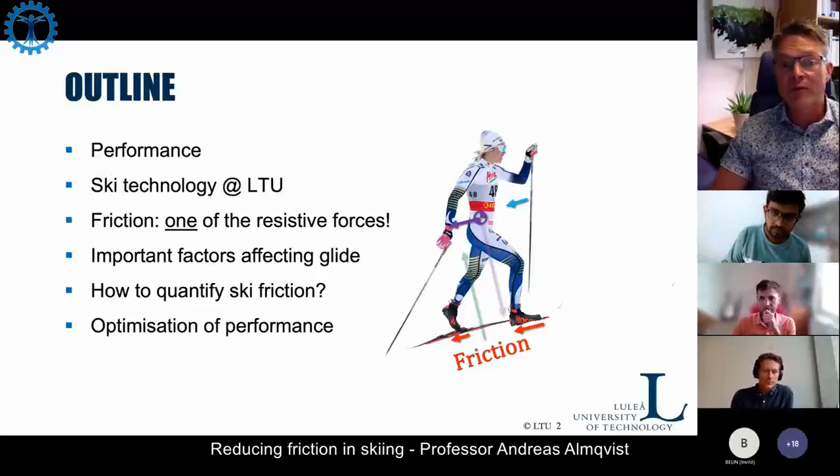And in the end, I hope to deliver what we aim at, namely to optimize the performance for an individual athlete.

So if you look at this performance loop, you realize that it is about how the athlete's physiology and biomechanics and the sport-specific technique and technology together contribute and collaborate in producing propulsive forces and in causing resistive forces.

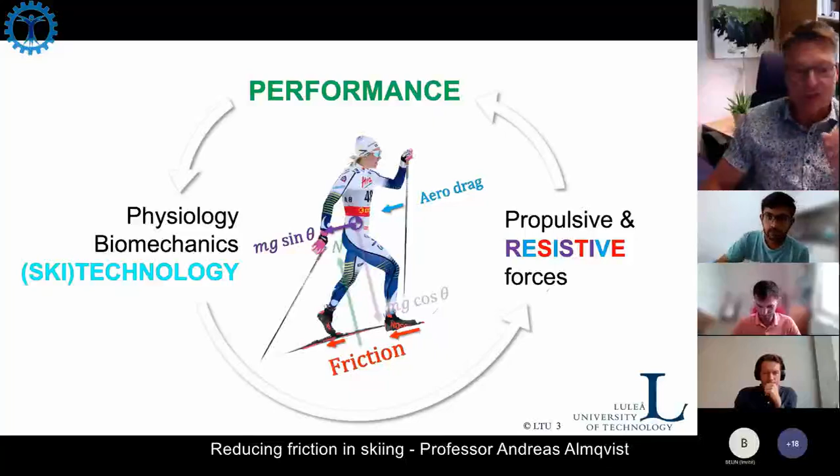Resistive forces are what we have been focusing on here in Luleå. The ski tech team here works together with the Swedish Olympic Committee and the national teams in both cross-country skiing and biathlon.

What we are trying to do is carry out real scientific studies on how to select ski type, ski base grind, waxing and metal embossment drilling to optimize glide performance for different conditions. We work currently in 3 parallel but highly interconnected tracks.

We look at both the interaction between the skier's biomechanics and the material. Then we have a virtual ski laboratory where we build models based on what we have from machinery tribology and continuum mechanics in general. And then we build and develop tribometers and test methodology to actually quantify friction in skiing.

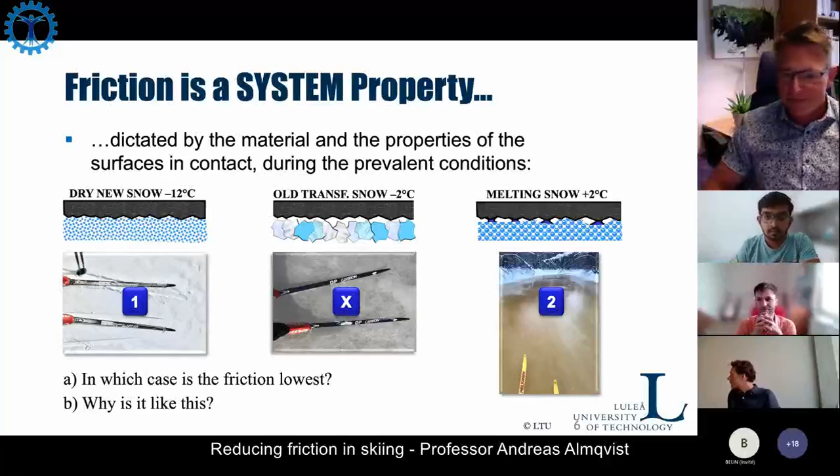What we are trying to do is, of course, answer why this is the case. And to do that, we need to consider a number of different factors.

For example, the load - the skier's body weight under gravity and on the track in all directions - will affect the frictional behavior. The geometry of the ski and of the track itself. And then on the micro scale, the surface topography and the snow - what does the snow surface look like at a certain condition? Also the hardness of the ski base and the hardness of the snow.

Here I've listed an acronym for the base material in skis: ultra high molecular weight polyethylene. That can be doped with different other constituents to enhance the gliding properties and also the wear properties of the material.

Wetting - we know that hydrophobicity is a player in skiing. So both the wetting and the surface tension matter.

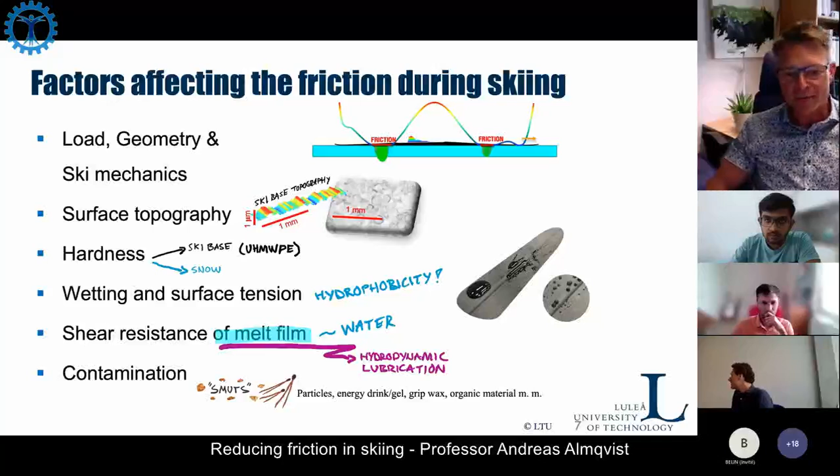So, maybe there are other factors too, but these are the main players. Once we know them, we also need to quantify and analyze the effect of them. For load, for example, we can do plantar pressure measurements.

We put an insole in the skier's boot, and we can measure the plantar pressure distribution, so we know how their position affects the equivalent loading position on the ski.

We can also measure the pole force with specially equipped skiing poles. By this we can tell quite a lot about the propulsive forces during skiing for an athlete performing various techniques.

For the geometry, we can use ski camber analysis devices and machines. One example is a giant profilometer stylus that measures the height of the ski when it's subjected to a certain load. We can complement that with numerical methods to tell more.

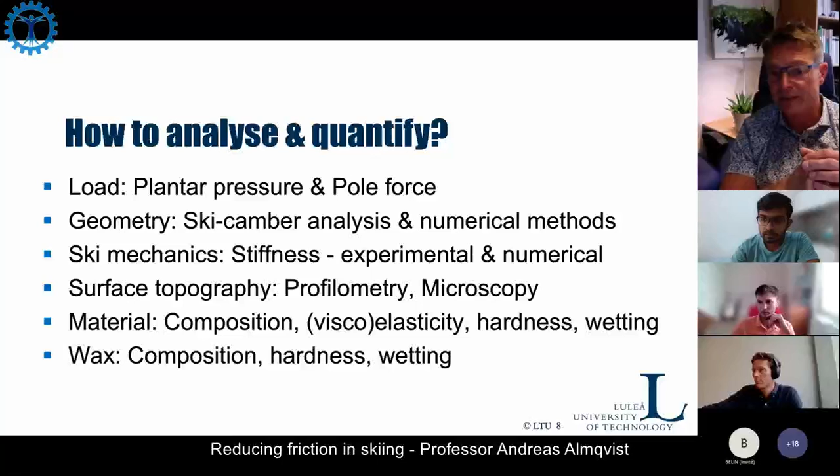Now, skiing. Friction in skiing means that we are viewing a multi-scale and multi-physics problem, like most of the tribological systems that we have. They are mostly of this type, but the difference is we have different physics perhaps on different scales in different applications.

What we see here is a ski camber profile, the profile of a ski loaded in a ski camber analysis machine. To see the height variation, I need to amplify it 100 times here. We see the plantar pressure distribution of the skier and the equivalent loading position that is actually causing this camber profile, and that causes the glide zones to appear exactly where they are. It's in those glide zones that the friction develops.

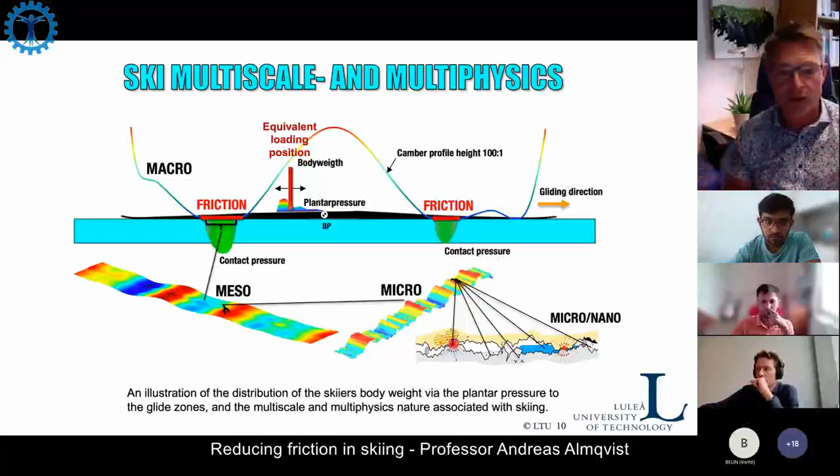But then there's the multi-scale aspect, and we will see what happens on the different scales. If we look at the glide zones with higher and higher magnification, we will see different things, and all of this contributes to friction in different ways. We will go into that in more detail here.

In the next slide, we can see schematically how the load from the plantar pressure on the skis actually causes load between the ski and the snow track. If we exaggerate the ski cambers, we can see that the profiles of the left and right ski will be different. This is a dynamic problem also. Think of when you are gliding, there's always something that makes you not stand exactly with the same weight on each boot. So either the track or you can cause this.

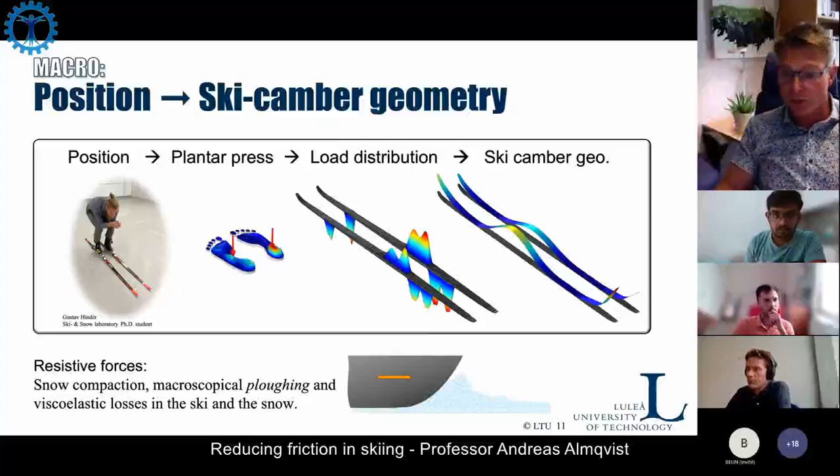The resistive forces that result in friction are mainly due to snow compaction. If we glide like skating, we are constantly paving our way on the track. The track is prepared, but we are still doing a lot of snow compaction with the ski. We will have some macroscopic plowing of the snow, perhaps if it's too grainy or if it's fresh falling snow. We will have viscoelastic losses both in the ski and in the snow itself. So there are quite a lot of things happening here on the macro scale.

That was for the ski part. If we look more into this, we have the ski camber geometry. What is actually affecting this? If we view the glide zones as two bearings from a tribological perspective, we realize that these angles might be very important. First, the leading edge angles, and then perhaps the trailing edge angles, and if there are internal pockets and so on. Also ski stiffness and damping, how the ski is built.

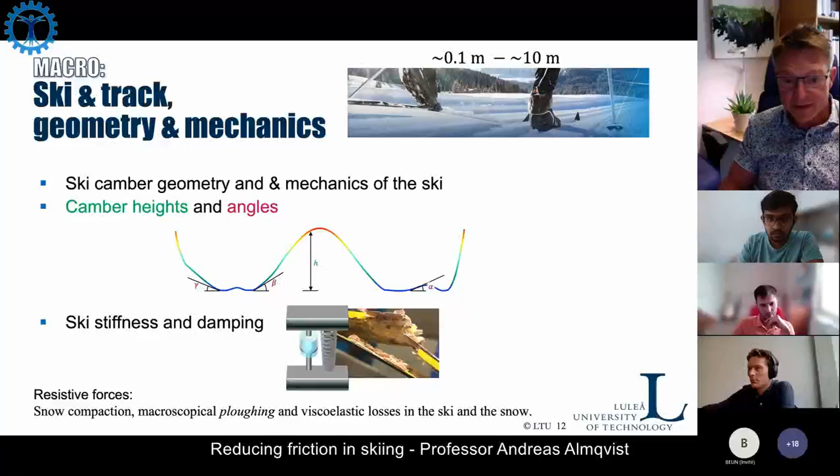Here we can see a broken ski, and we can see some of its interior. It has this honeycomb structure, a composite with a honeycomb structure, and this particular ski also has wood beams, or whatever you call them when they are that thin. There are many different materials inside the ski, and that causes it to behave in a certain way mechanically. So again, we will have these losses as I listed.

This ski camber we can measure, appreciate, and estimate in different ways. The traditional way is to place it in this machine, a ski selector, the brand, and then apply the load at a certain position with this type of shoe, or whatever you can call this piece of load transferring interface to the ski.

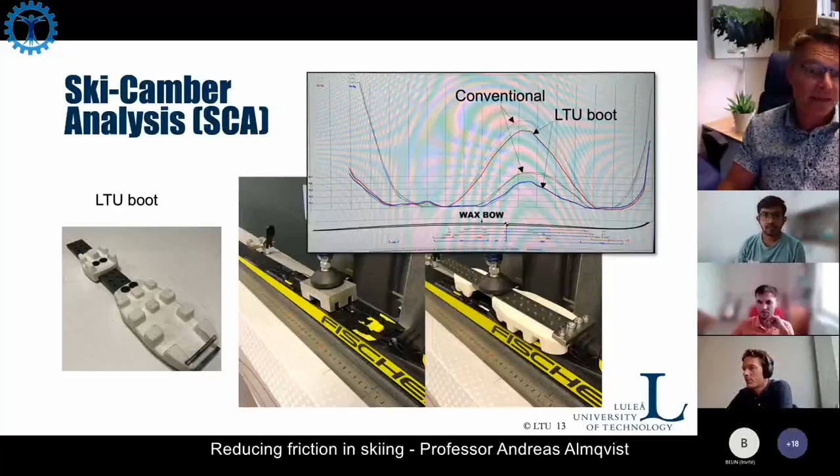But what we quickly did here in Luleå is develop a measurement boot, because we understood quite quickly that this one will not distribute the load the same way as the ski boot does. That can be clearly seen if we compare a conventional ski camber measurement with the LTU boot measurements—they are rather different. Here is some illustration of how the load affects the ski: here it can only affect that area, but here it will affect a much larger area that will cause the ski to collapse in a different way.

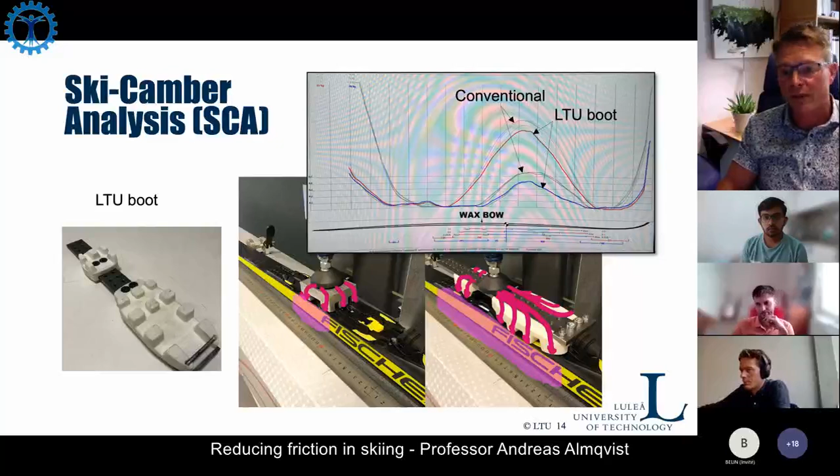If we complement now this, now we come to the dear child of mine. So how to complement these measurements with some computational tribology. So we use our boundary element code and include not only the load balance but also

the moment balance of the ski. And we actually use an ANN which we train on the ski so that it can give us very quickly the ski camber for almost any load and position very accurately. So we can really run quasi-stationary gliding in our tool here, in our numerical tool.

Well, anyway, we take this tool, this contact mechanics software, and in that we make contact with the numerical ski and numerical stone. Because in the ski selector we have a stone which the ski is laid on top of, which is very flat, made very, very flat, so we can accurately measure the ski camber profile. Anyway, we put the ski in contact with a stone. We understand, tribologists understand, that the contact here will be very small, even though we are on macro scale.

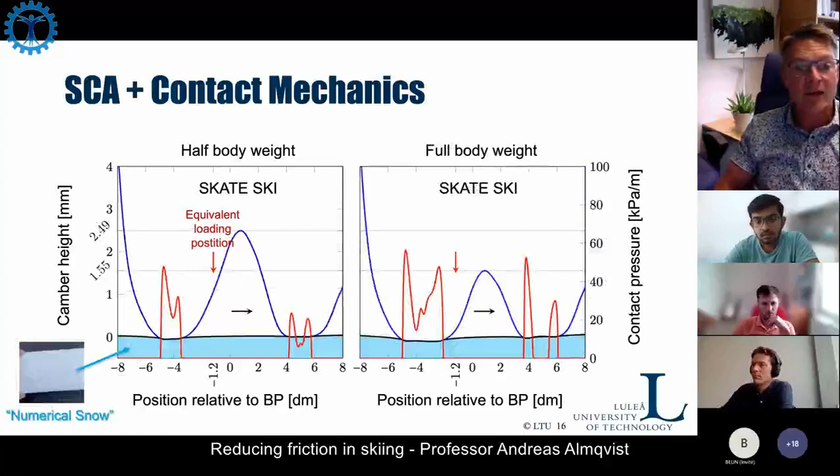Now, what the beauty with this is, when we have this model, and this model replicates very well what we see in measurements, then we can replace this numerical stone with numerical snow. And that will, of course, distribute the load in a completely different way. And now we are getting a little bit closer to what happens when we are gliding on our skis in a snow track.

And here is the skating ski again, but then under both half and full body weight. I mean, half body weight would be when we were gliding just straight forward, standing with equal weight on both skis. Full body weight would be if we were gliding on one ski, and when we are skating, we are gliding on one ski most of the time - we do the technique in this way that we glide on either one of the skis. And the good skiers, they produce more than a body weight on the ski, of course, because they are jumping more or less up and down on the skis.

But anyway, so that distributes the load quite differently, and of course that leads to compaction of the snow, viscoelastic losses, etc., which can be appreciated in some way, and hopefully we can correlate that with measurements and see what the friction is.

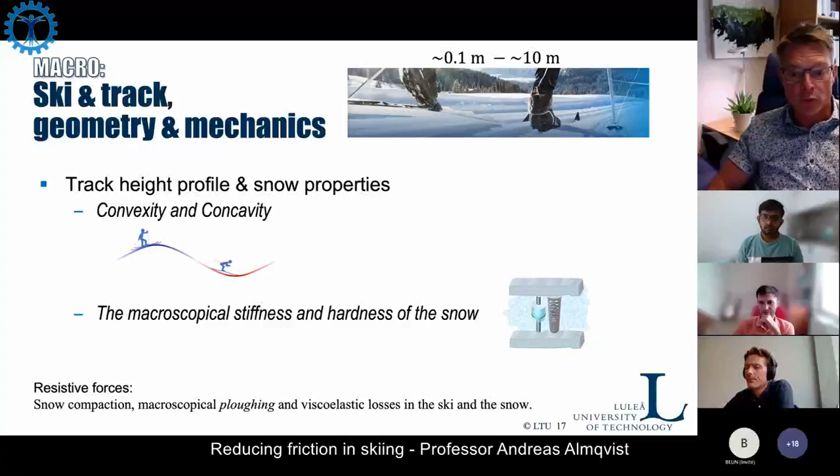And then also the properties of the snow, macroscopically, stiffness and hardness - what are they? So these are contributing to resistive forces here. The ski track, the ski track geometry or profile, and that one we can map with very high accuracy with a GPS.

With a highly accurate GPS, namely a real-time kinematic global navigation satellite system. So if we use that, we can have an accuracy in all three directions of around 1 centimeter. So for this rover module, we have just let it slip down this descent, and we can capture its position with very high accuracy, and we can also therefore capture its speed very accurately.

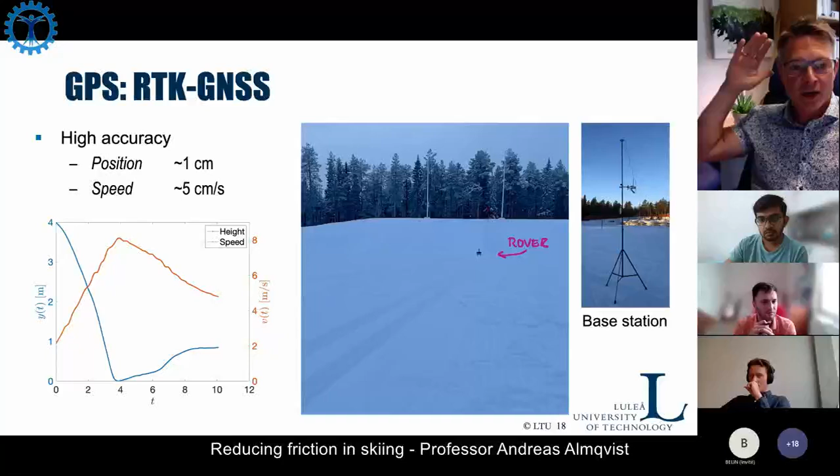We cannot measure the friction directly - that we cannot, never do. The friction, that one we must somehow calculate. The friction coefficient we must calculate. But based on this measurement, we can. And we will see how we can use these measurements to actually receive both the friction coefficient during acceleration and during deceleration. And these can be completely different, which is quite interesting.

Perhaps we will have pockets, and these angles we were talking about before, they will contribute. And we will also have some torsion of the ski, and therefore we cause edge effects, and they can be rather large.

But we understand now, if we have these pressure zones or points, if they are located at the place where we have most of the macro scale pressure developing, then this will plow the snow much more than if they are on another location. So the location of this is very crucial.

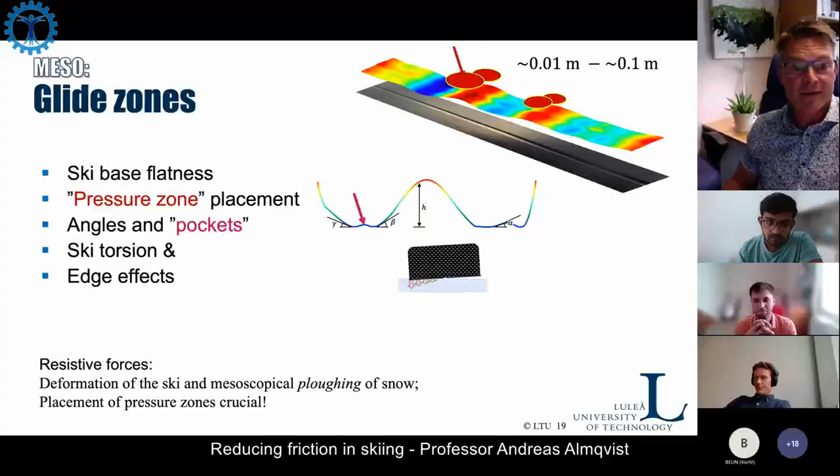And this is really hard to appreciate, to estimate, measure. But this is why two pairs of skis, for example, made just after each other in the same machine, will not have the same glide performance. There can be quite substantial differences actually, because of these small factors.

And now microscopical plowing is a contributor to resistive forces. And of course, the rougher the ski base, the more plowing. But on the other hand, the rougher the ski base, the less wetted part of the contact, and therefore it may reduce the friction in this respect.

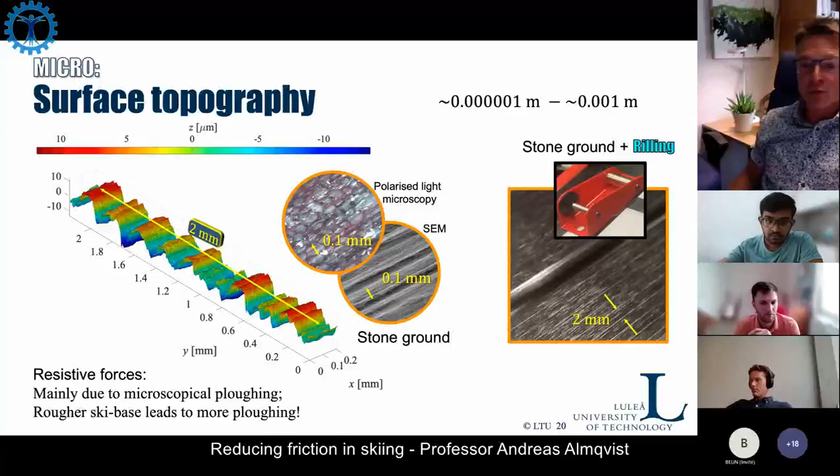To produce that structure of the ski, we typically use a stone grinding machine. And these are quite sophisticated nowadays, and they even allow for computer programming, but they also typically have these interfaces, a programming menu, where you can set a number of parameters - for example, you can set the speed of the stone.

But to produce the texture, the structure of the ski, you must first structure the stone. And you structure the stone with a patterning tool - it's just a diamond tip, which you can then control. You can control the depth that is pushed into the stone, and then you can control the speed of this one as it slides over the stone surface.

And in combination, you can do that from side to side, and then you can do the grinding in a sequential manner, so you have several grinding processes finally ending up in the finished one. But if you have a certain feeder speed on that diamond tip, it will produce a certain pattern on the stone if the stone is spinning at one speed, and another pattern at another speed.

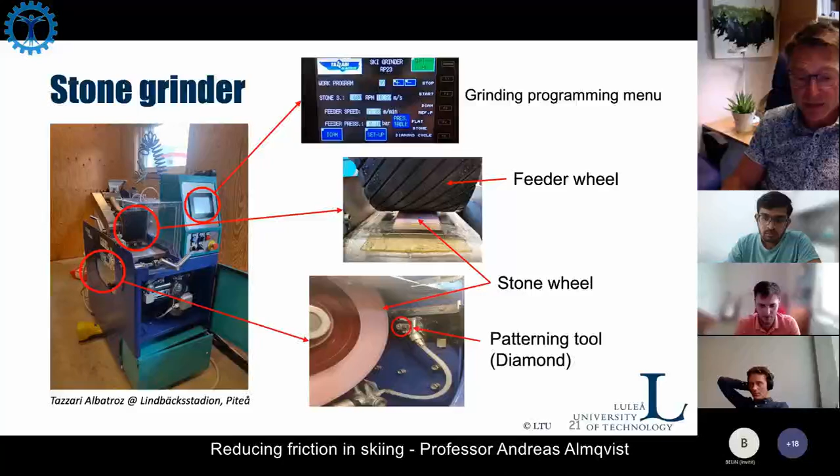Then when you grind it, you need the feeder wheel, which is pressurizing the ski onto the grinding stone, and it also moves it through the grinder. This gives the structure, and you can program many parts of it, as I say. So it's almost too many parameters for us to handle, but it's fun - we have all these degrees of freedom.

Now the grind - even if the elite athlete has 30 pairs of skis in their garage, the grind cannot be too specific. So for an actual condition, they need a certain topping, they need waxing, and they need an extra pinch of texturing, typically done by rilling.

I don't know, in Swedish we say rilling - we rill the ski. I don't know if this is the exact English translation, but we take this tool and we press it onto the ski base and glide, roll, or slide it over to create an additional pattern. And here you can see, for example, this tool has created these deep grooves on the stone ground, and waxed, brushed, scraped and brushed surface to reduce viscous friction, to reduce capillary drag.

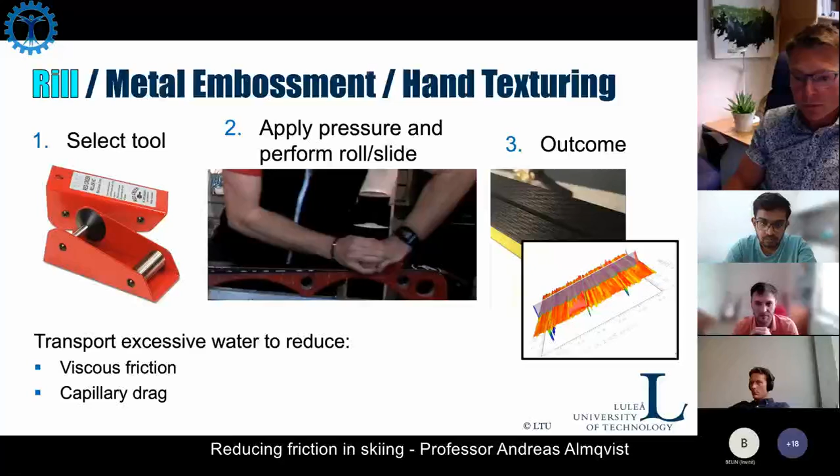On the other side, we have the snow, of course, and that deforms. And here's some 3D tomography of this by other researchers.

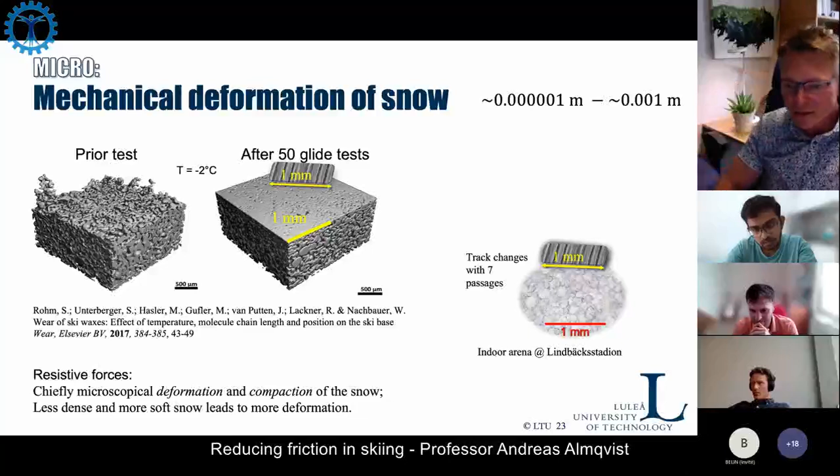Now this was supposed to be moving, I guess, but it wasn't. This was supposed to show an animation of how the snow is displaced when you are moving over it, and it was actually looking very nicely before I showed you this. It has stopped moving, and here it has also stopped. Now I cannot access this one either.

This was supposed to be a movie where we went into the material, but anyway, that you can perhaps depict that we can move into the material and we can see both the grain structure and if there are other constituents within that one.

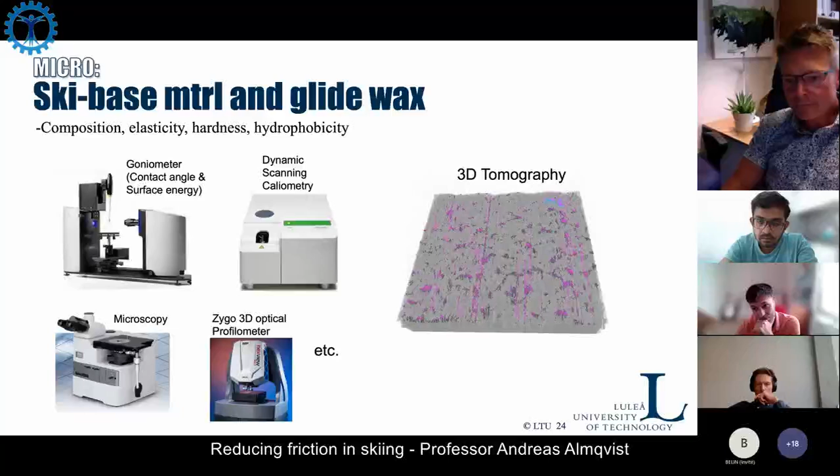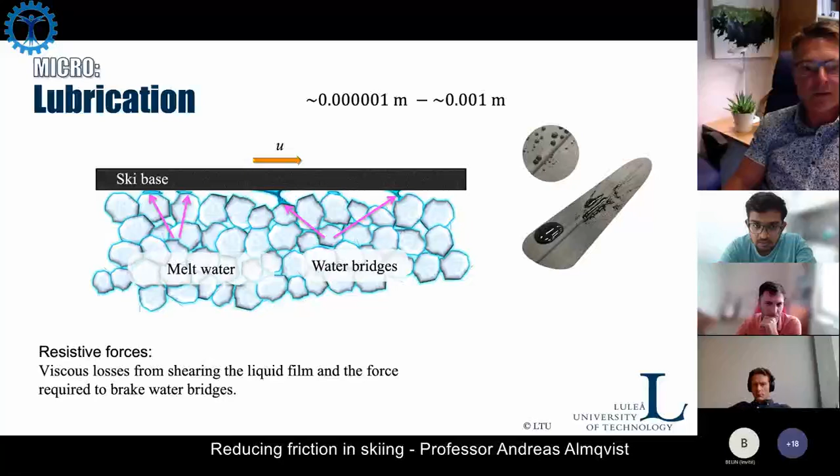In tribology, we have lubrication. Tribology is friction, wear, and lubrication. And the lubrication here is partly produced within the contact by friction. So friction melting causes some extra lubricant, water, to glide on.

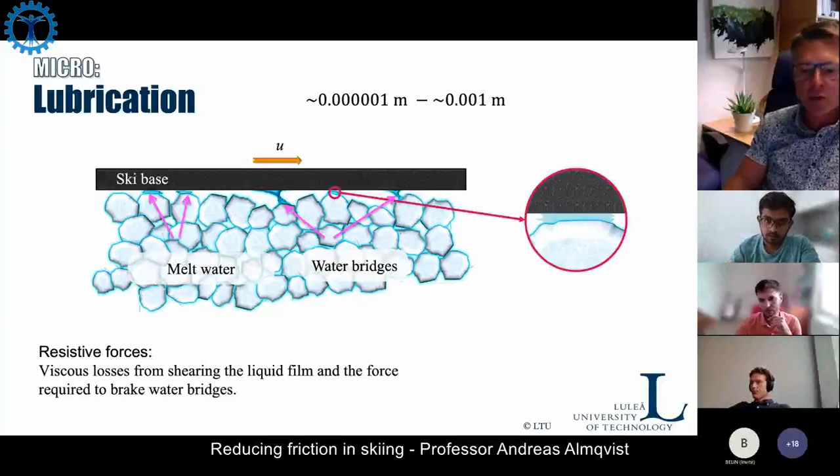And I mean, these are just very, very thin films of water, and perhaps it's not really water, it's a quasi-liquid-like layer. And it's important that the water is not all over the place, but it's located at the contact spots, which altogether mounts up to a small area.

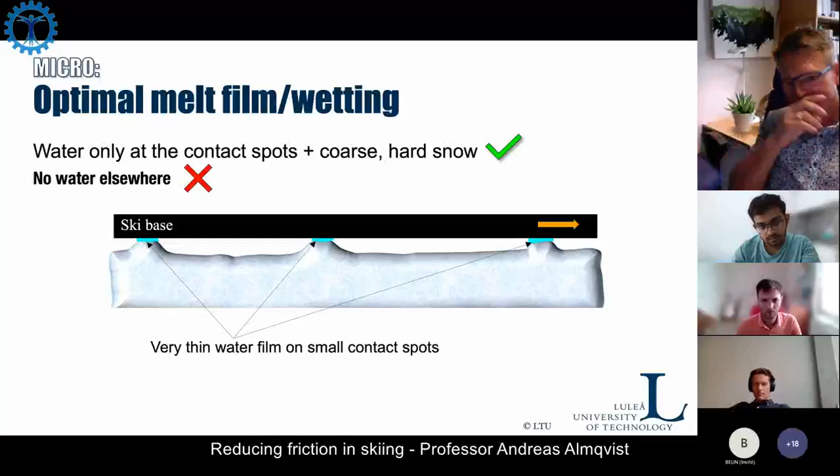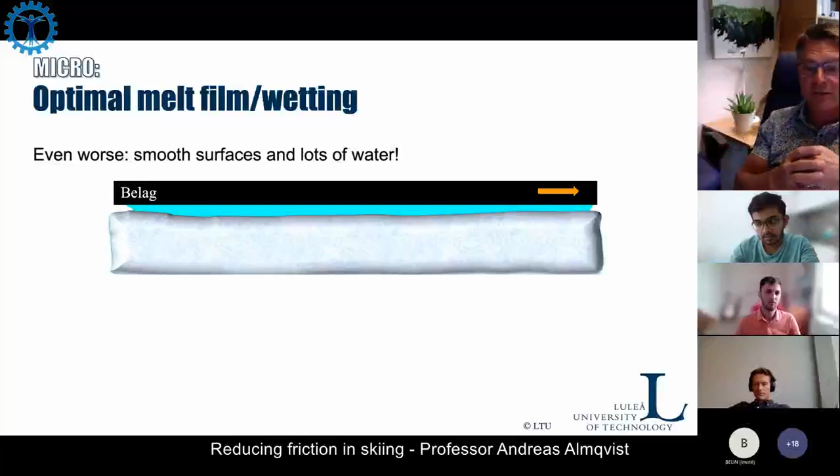Because then we can have low friction. Too much, we will break too many bridges, and if we have even more, I mean, the capillary forces associated with thin water films, they are tough. It's a tough one to break. How to deal with this?

Yeah, we have been talking about a lot of that, and that is texturing. So the surface texture itself, both the stone grind and the additional one, and the wax, of course, to improve it even more.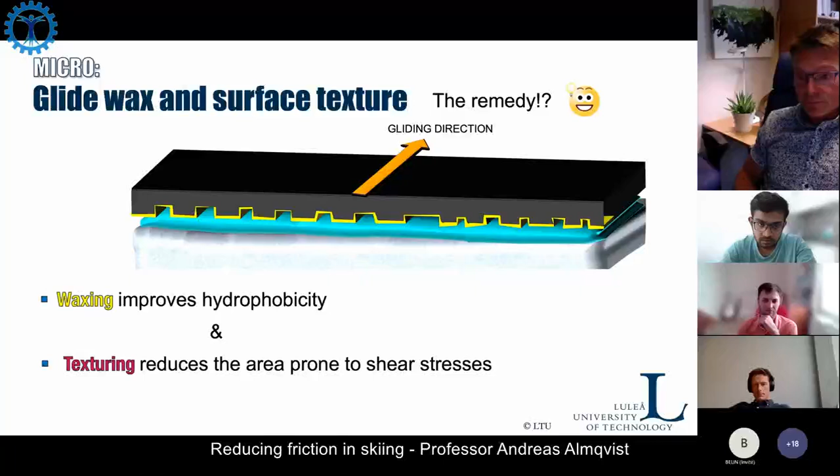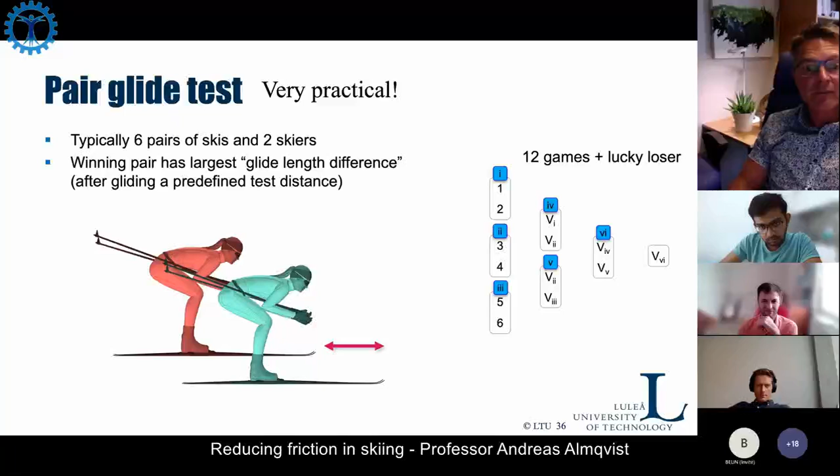So how to quantify the ski friction then? Many ways of doing this, typically and very practically done in pair glide tests. So you can do a knockout contest, and quite quickly you get a winner pair of skis. You can do time trials with skiers, that's also quick.

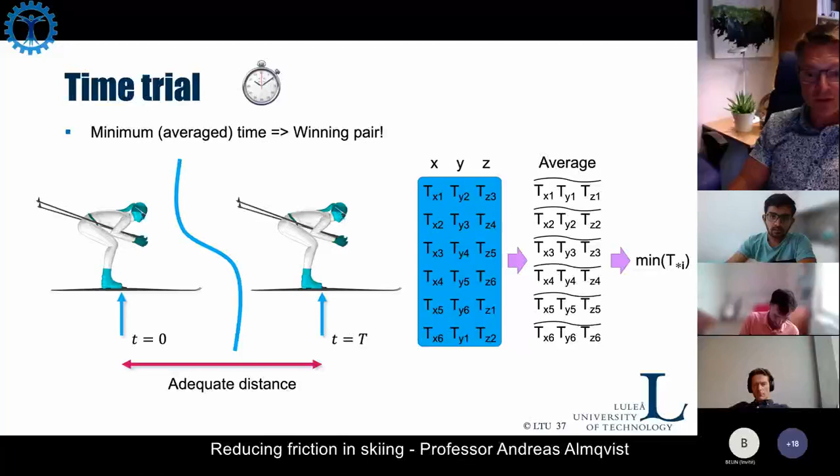Be sure that you have a good design of experiments and a feasible number of tests, and hopefully you can get an average minimum time which actually decides the best pair of skis in this case. We could test the structure, ski base structure, and/or wax, for example. If you take away the skier, the human factor is no longer there, and that can be quite good. I think it has disadvantages too, of course.

And here is one example where we did this glide test. So we measured the time it took for the sled to run 30 meters. And we can all see that the first test in each set here is the fastest one.

So we let it slide down, we pulled it back, let it slide down again, repeated that 5 times here. Again, 5 times with a new pair of skis, new pair of skis, new pair of skis, new pair of skis. And you can see that the glide time increased every time, but also the glide time reduced during the tests. So the way was paved, the track was getting better and better frictionally.

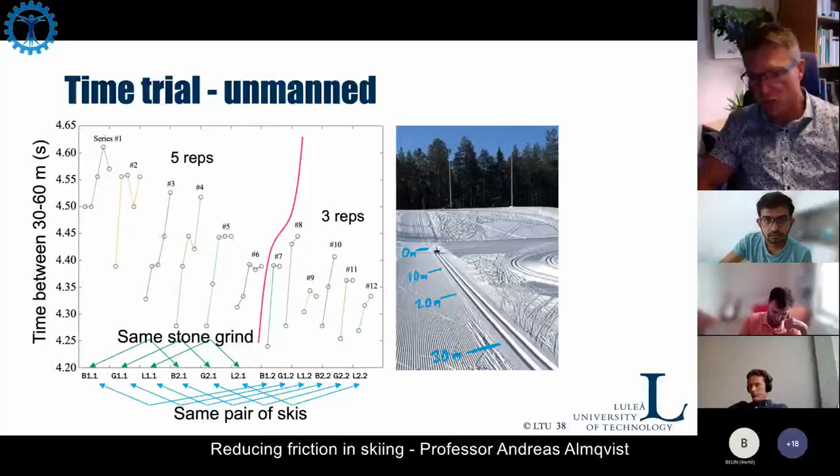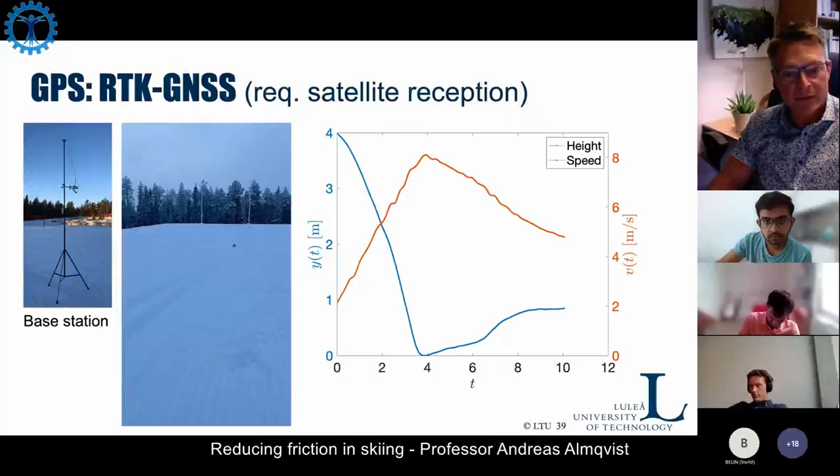So there are many aspects we need to think of when we test the glide performance of skis to reduce the friction. Now remember this unmanned test with the RTK GNSS, then we can get the velocity and also the height profile of the track. And if we feed that into some numerics built on Newton's second law only and run some optimization, we can obtain the friction coefficient. And here is a display of that, and we can see that the average acceleration friction coefficient is twice as high as the retardation friction coefficient.

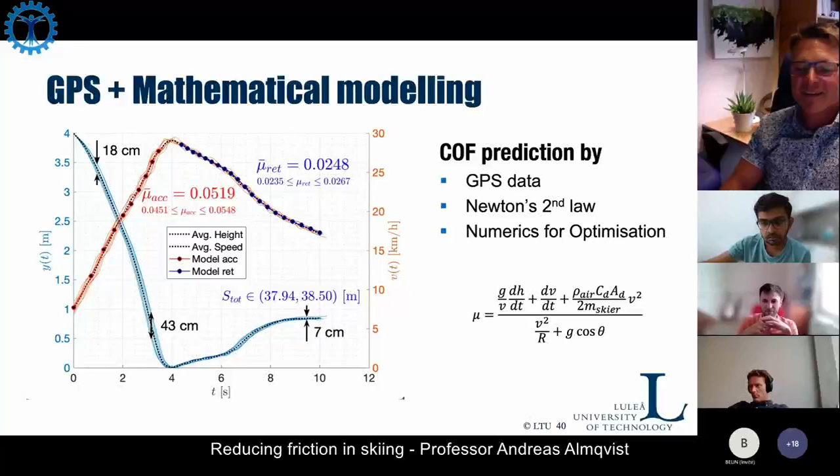And this is quite interesting. And we can talk a lot about the reasons why this is.

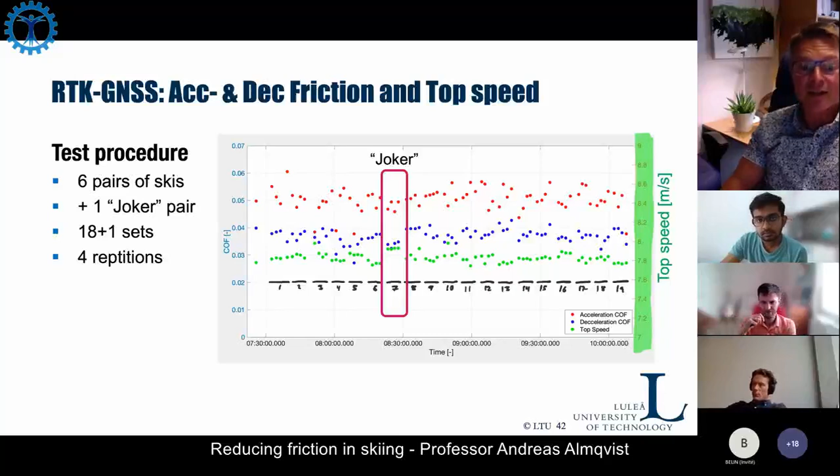Now, if we do this a lot, I mean, we can see very clearly, and we can compare different pairs of skis in terms of acceleration friction, deceleration friction, and top speed. And in this test, there is a joker pair of skis. So there are 6 pairs plus 1 more, and the joker, it actually sits here, and we can discern that this is a race waxed pair of skis which has significantly better top speed, lower acceleration and low deceleration friction. So it's quite interesting.

That is outside. Outside, there are many factors affecting the friction which we do not have control of. So if possible, it's good to be indoors, and there are many examples of indoor facilities for doing glide tests.

So we have a non-contact optical sensor which we can capture the speed with very high accuracy. That means we can obtain the deceleration friction coefficient from numerics, running it through Newton's second law. Because even though this is just a small sleigh, it will still have air drag, so we have to remove that from the deceleration data, the speed data, to deduce the deceleration coefficient of friction.

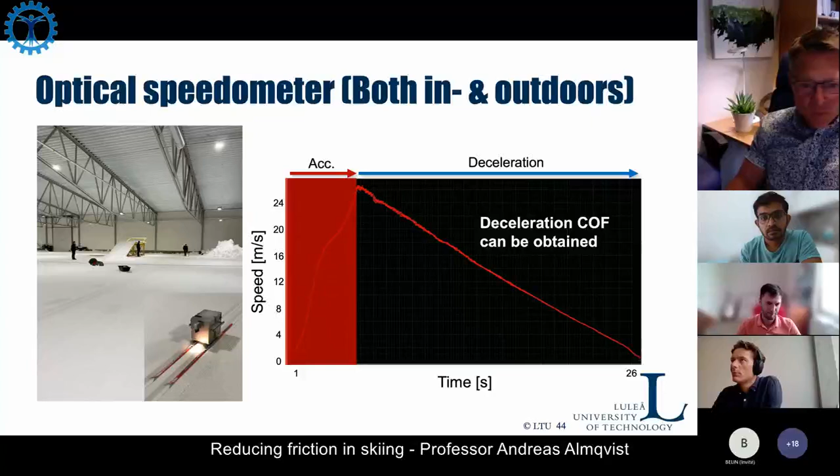I don't know, was that one? That was supposed to be an animation. I can quickly show you.

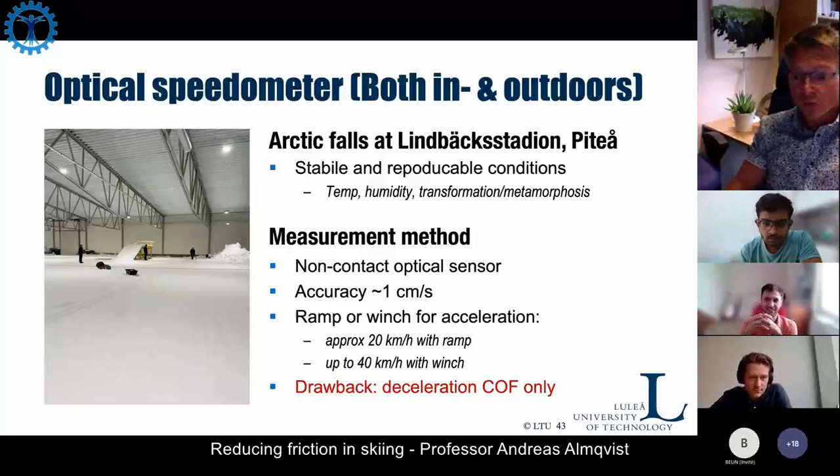So we start this thing up with a winch. There was some cushioning material loosening from the winch, no problem. But in this way we can do very controlled experiments indoors, and get quite accurate estimates of friction for different skis structured in certain ways and waxed in certain ways and so on.

And now with that, with all these methods I've showed you, our work continues towards our long-term goal, which is to start with 2026, for the Milano Cortina Winter Olympics. And...

Here, of course, we need to do the optimization. We need to include the athlete. Taking a certain athlete and giving them a certain pair of skis will produce one gliding resistance. Another athlete on the same pair will have another resistance. So we need to combine the athlete, the ski, the structure, and the waxing all together to optimize for the skier.

This also includes, on this picture - it doesn't show the track, but of course the topography of the ski track is also affecting this, because this certain athlete will perform differently in different parts of the ski track. And then you can optimize the resistive forces in that respect too, or should.

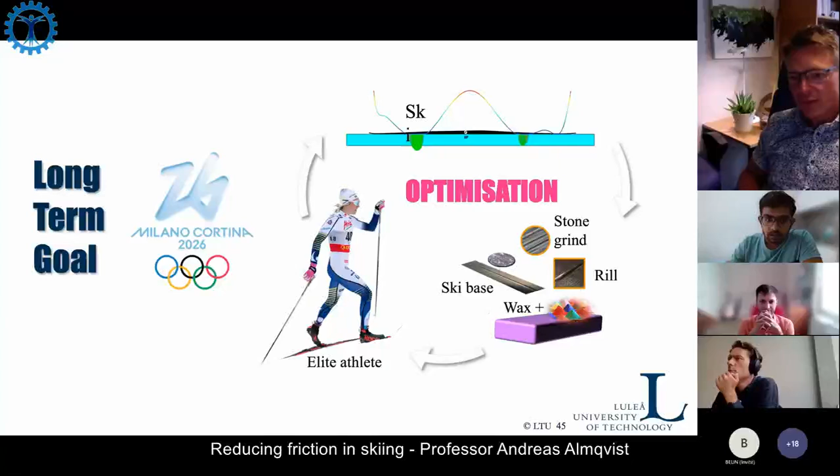With that said, I would like to conclude this presentation, and I would like to thank the sources for funding that we have, and I would like to thank you for listening in on this webinar, and I hope to receive some questions. I hope I didn't go too long so that everybody fell asleep.

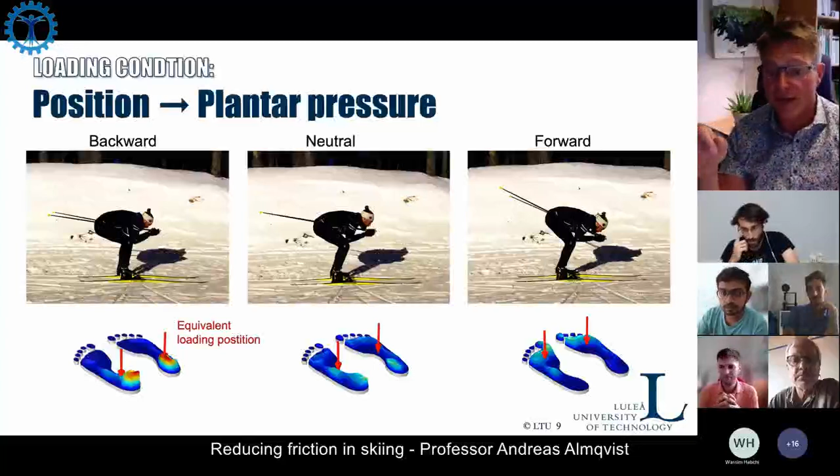But imagine if you just do a poling cycle, over and over again. We've studied this, and we can bring that poling cycle into our contact mechanics software, and then see how the glide zone distributes the load. We can also see how the ski camber collapses. Then we can determine, for example, how much kick wax we can allow for a certain skier without reducing the glide too much.

Yeah, that was actually a bit what I was after—this thing that if you don't know exactly where it glides, then you cannot really apply the treatment on the right spot. But then again, that's already quite a complicated topic: where to apply the treatment, let alone what treatment to apply.